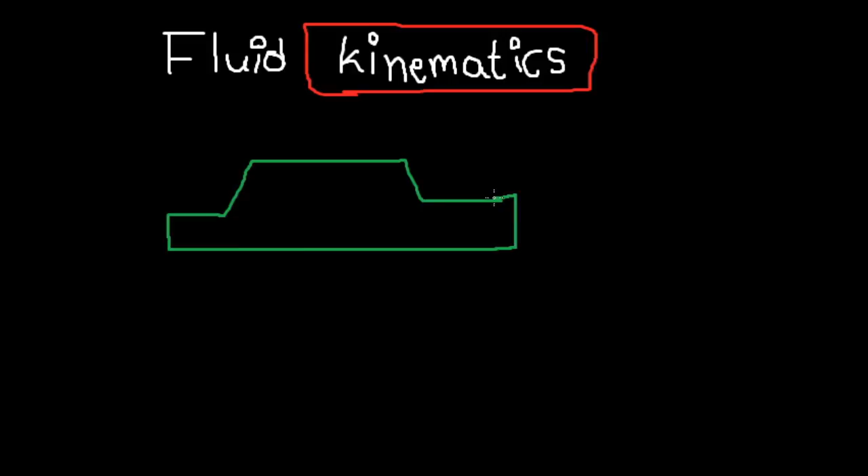So I'm going to highlight this with the red color. So kinematics is a branch of science which deals with the motion of particles without considering the forces acting on it. Suppose, let me say, there is a vehicle, a car. No, I'm not a good artist, but I'm trying my very best to explain. A car, and imagine a person was pushing it from the back face.

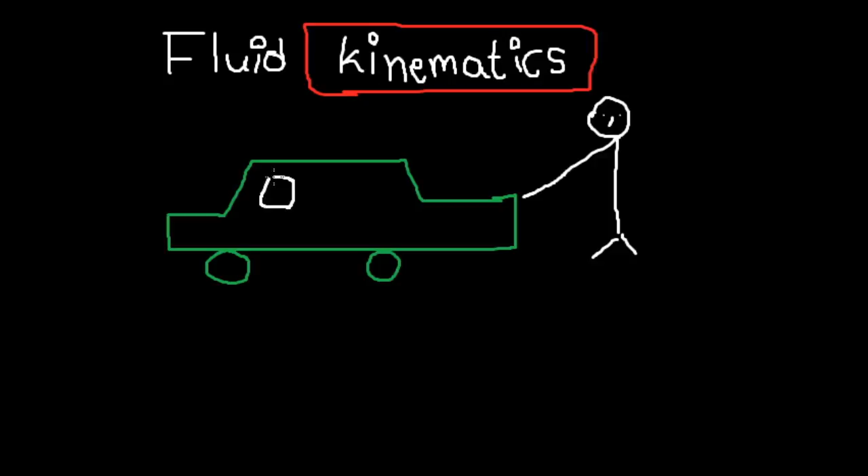So in kinematics, the kinematic science tells about the motion of the car here in this example, but it will not consider the person who is pushing the car, and indirectly he is applying the force, as the figure tells us. So kinematics is a science which tells about the motion of the particles. Here the particles or specimen or object is the car, without considering the forces acting on it.

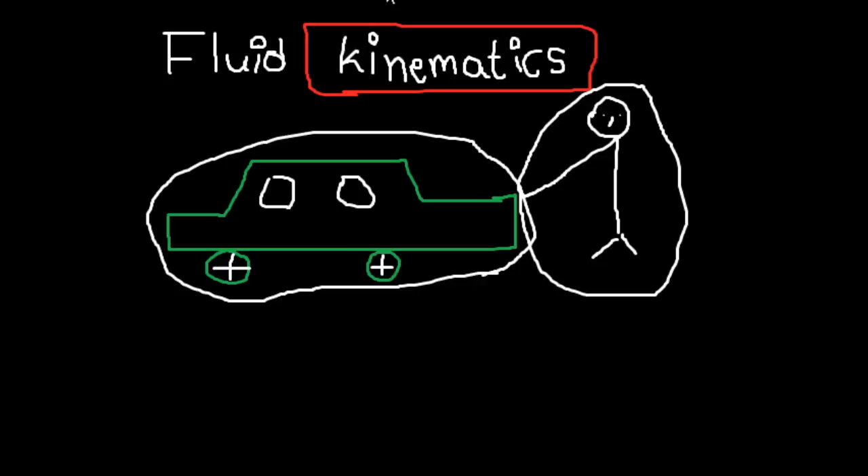So if the person is acting on the car, he is a force, but kinematics will neglect him and only see about the acceleration, velocity, or something, which scientific terms we will see later. So when coming into the fluid kinematics, we will see about the liquid and their flow. And similarly, when we go into the fluid dynamics, let me move this around.

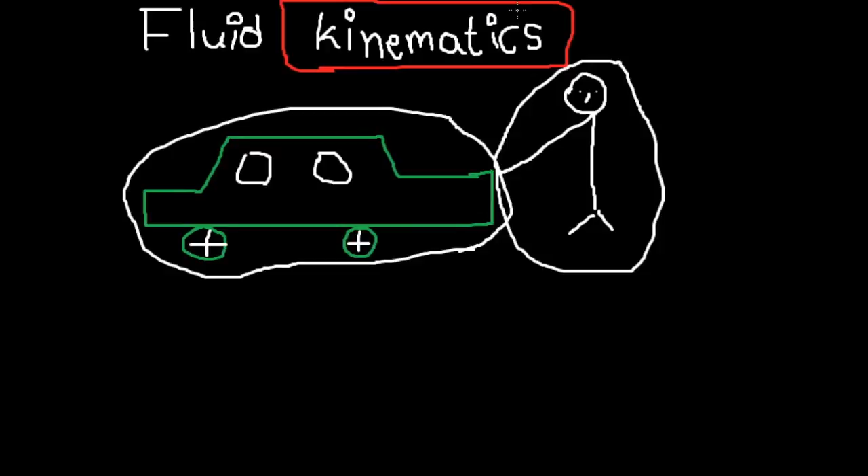Fluid dynamics is also similar to kinematics, but in this case of fluid dynamics, it is a science which deals with the motion of the particles while also considering the forces acting on the object or the particles. So unlike kinematics, dynamics is a branch of science which explains the motion of the particles or object or specimen. Here the car is an object, or it is better to call it particles.

Don't take this example literally; I was telling this example for you to understand it well. So imagine the car is a particle. Dynamics is a branch which will also consider the forces acting on the car. Here the person who is pushing it is a force acting on the particle called car. So kinematics neglects the force acting on the object, and dynamics also considers the force acting on the particles.

Now, to study fluid kinematics and fluid dynamics very well, we need to learn about the types of flows. There are 6 types of flows in fluid. The first one is steady and unsteady, and the second one is uniform and non-uniform flow. My writing will not be so good while using a mouse to write. Uniform.

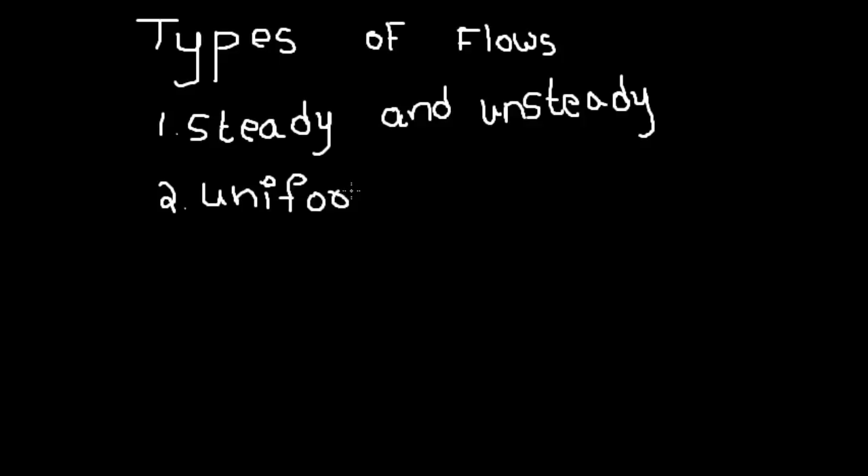Sometimes I pause the video while I'm writing, because otherwise it is inconvenient for me and you, taking a long time to watch the video.

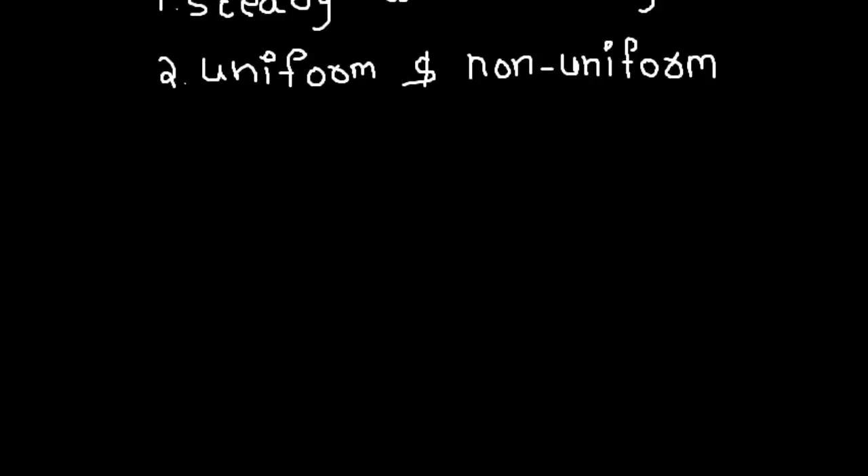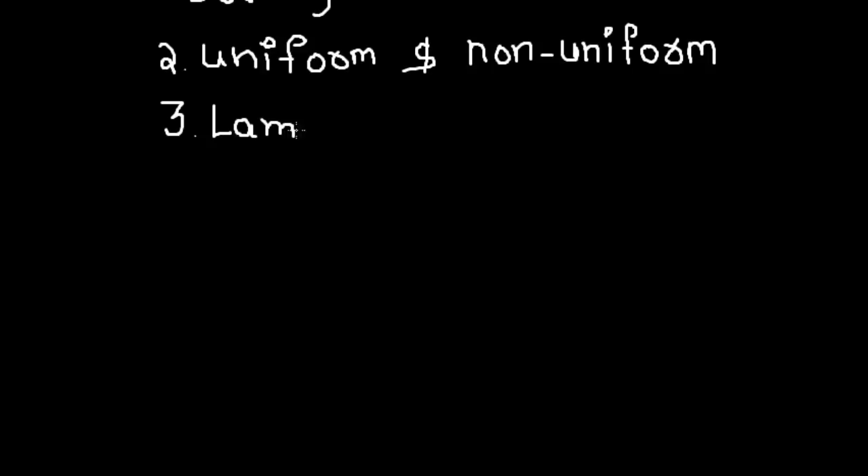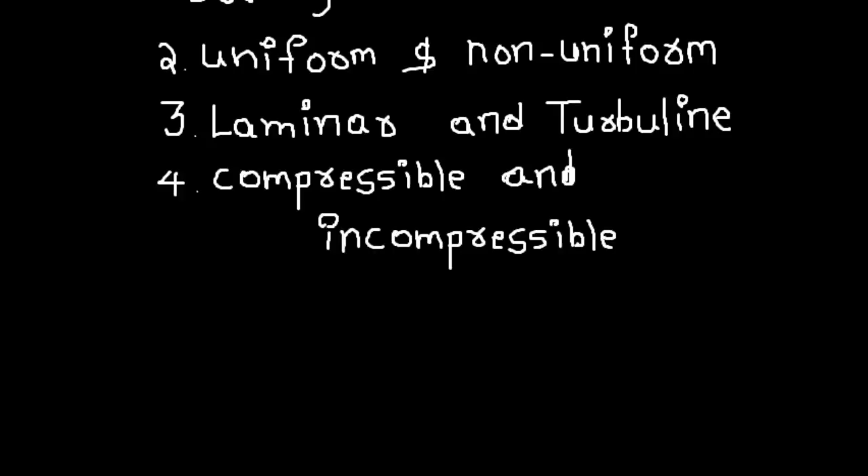And the third one is laminar and turbulent flow. And coming to the fourth one, it is compressible and incompressible. And the fifth goes to rotational and irrotational, and at last the sixth one, which is 1, 2 and 3D flow, which is one dimensional, two dimensional and three dimensional flows.

You may not see anything about this last sixth part, that is 1, 2, 3 dimensional flows, in my videos, because that doesn't cover my syllabus and I don't know about them.

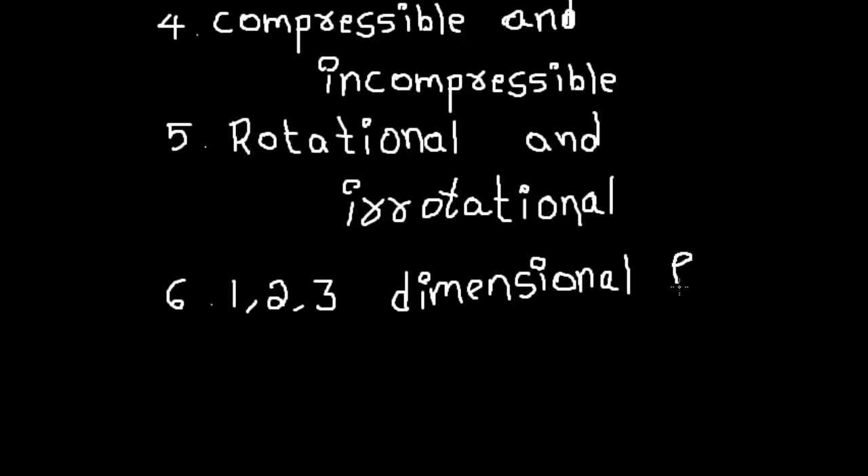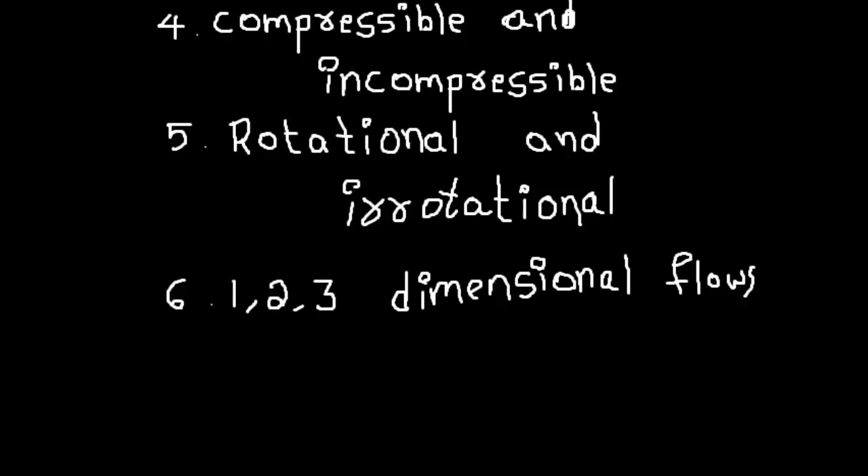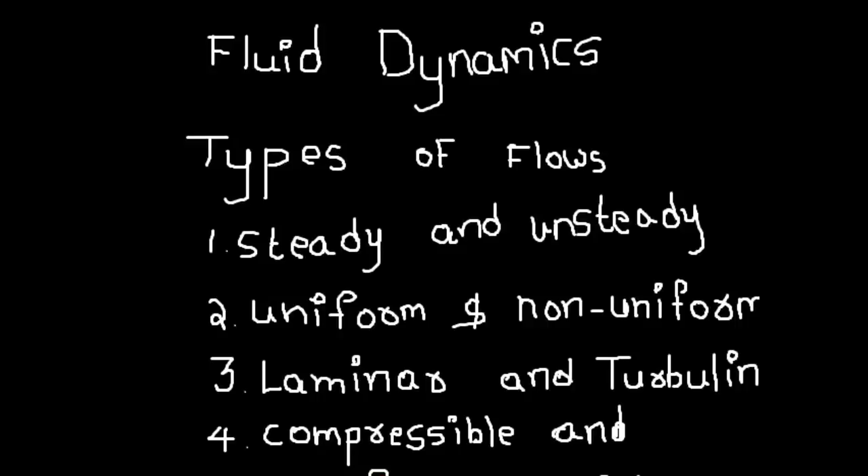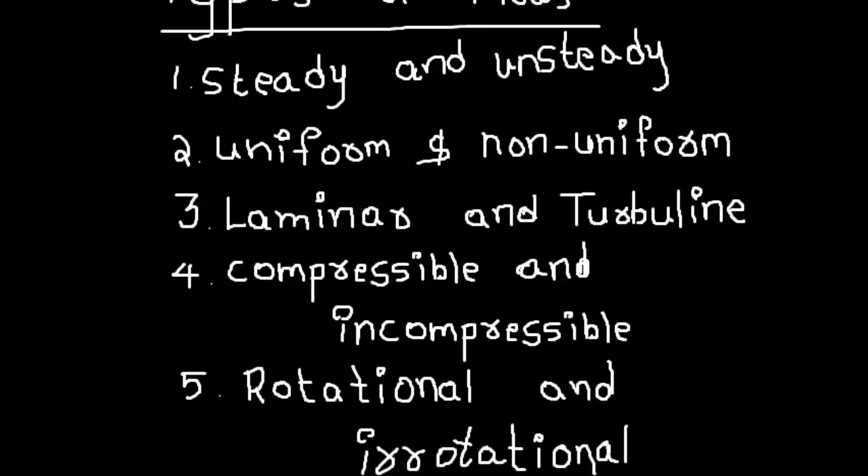So let us have a look once again. So we'll learn about fluid kinematics, which doesn't consider the forces, and then fluid dynamics, which considers the forces acting on the particles. And coming into the types of flows, there are 6 types: steady and unsteady flow, uniform and non-uniform flow, laminar and turbulent flow, compressible and incompressible flow, rotational and irrotational, and at last one dimensional, two dimensional and three dimensional flow.

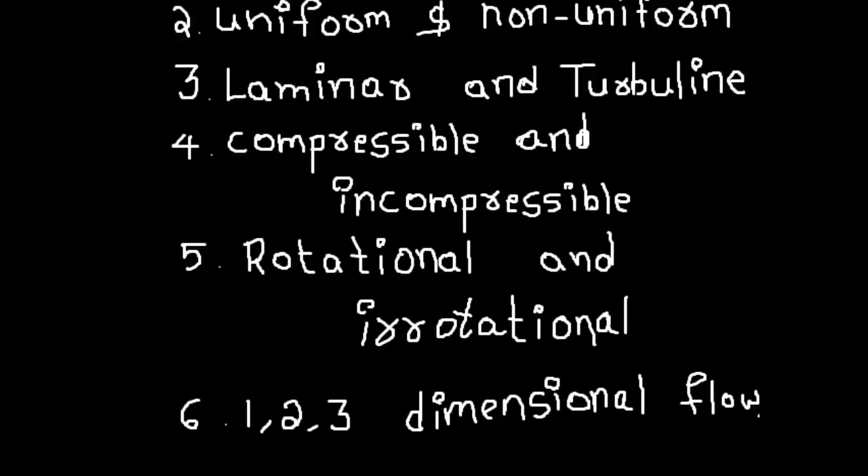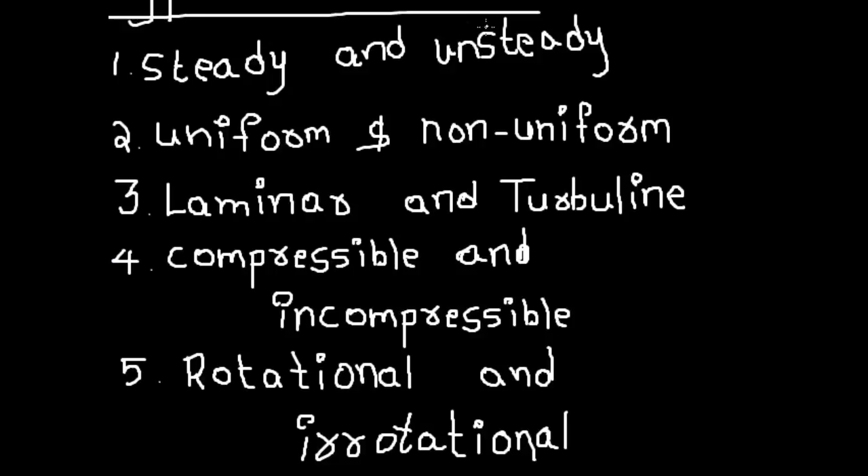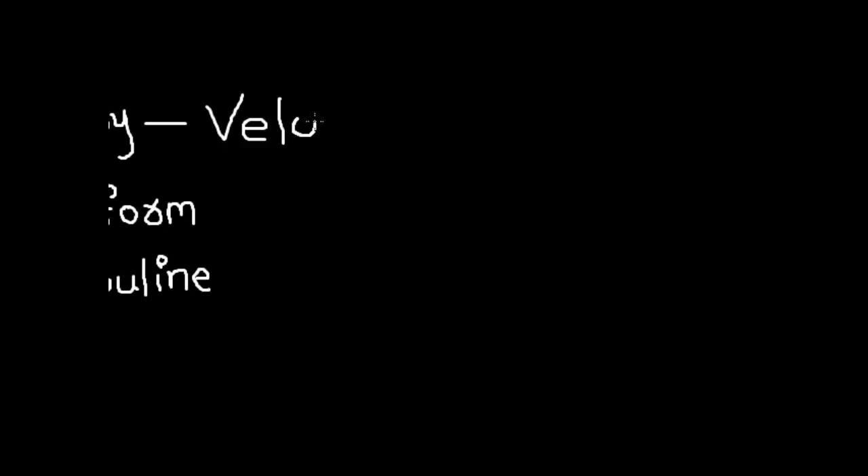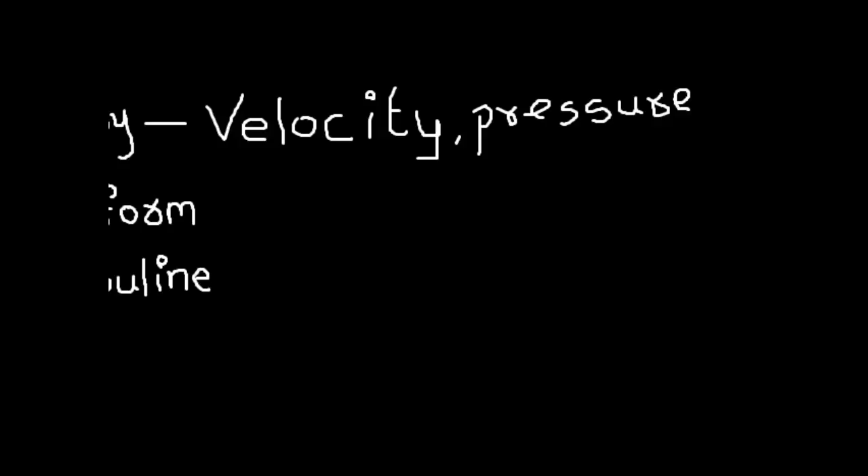Now let us see each one by one. So coming to steady and unsteady, these depend upon the fluid characteristics like velocity, pressure and density. I'm going to write it over here. So it depends upon velocity, pressure, and density.

So what I said is steady and unsteady flow is a type of flow that depends upon the 3 properties of the fluid: velocity, pressure and density. So how we tell is that if these 3 properties of a fluid at a point do not change with time, that is known as a steady flow.

And if velocity, pressure and density at a point change with time, then it is known as unsteady flow. Since they are changing with respect to time, they are unsteady, so it is known as unsteady flow.

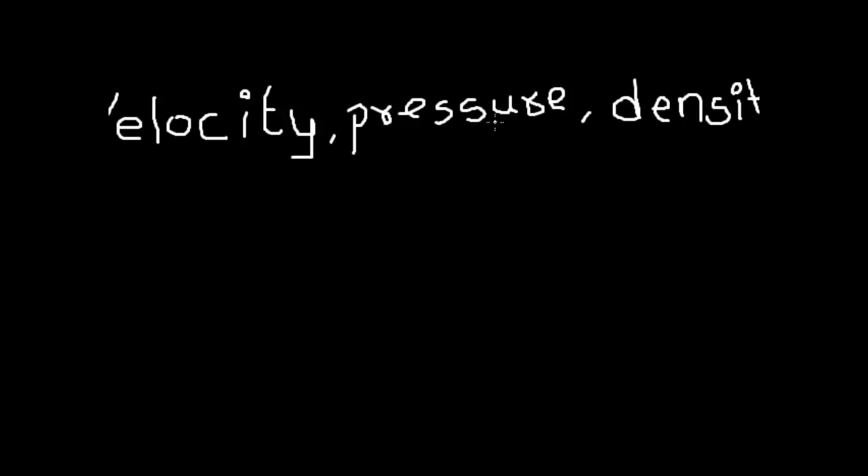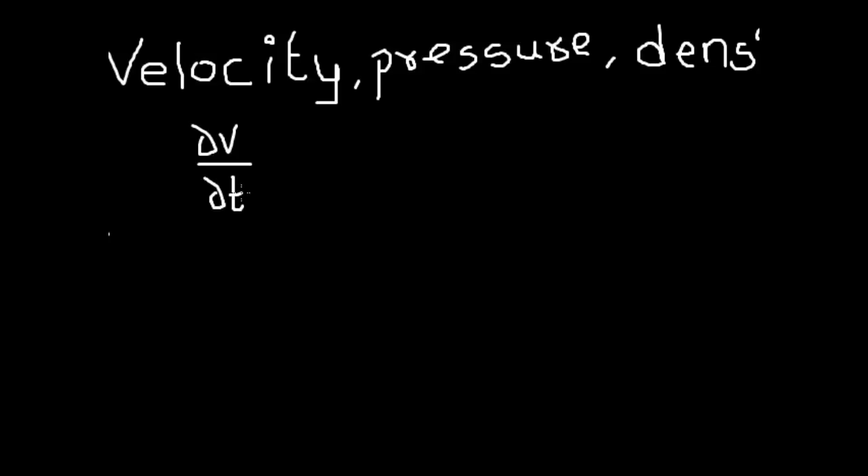So coming to the steady flow, the 3 equations can be given for velocity, pressure and density by writing ∂v/∂t = 0. This is for steady flow, and here we can write at x₀, y₀, z₀ equal to 0. And for the pressure, I will copy and paste it, it will save time.

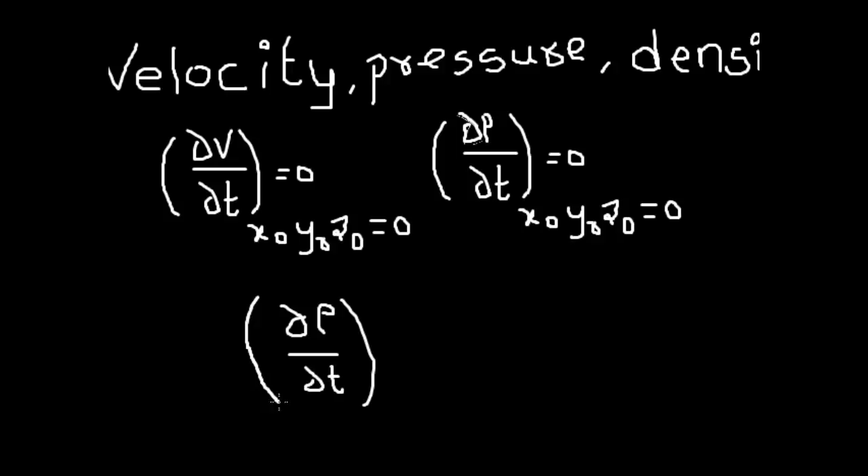Okay, for pressure we can write it as dou p by dou t is equal to 0. And similarly for the density we can write it as dou rho by dou t, which is again equal to 0. And we can suffix as x naught, y naught, z naught is equal to 0.

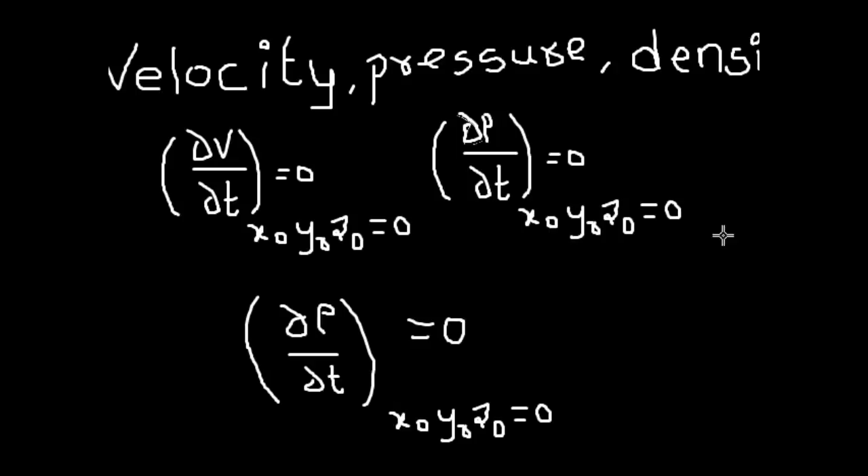For unsteady flow, since they change with the time, they should not be equal to 0. I mean, velocity should not be equal to 0, pressure should not be equal to 0, and as well as density should not be equal to 0. So that's about steady and unsteady flow.

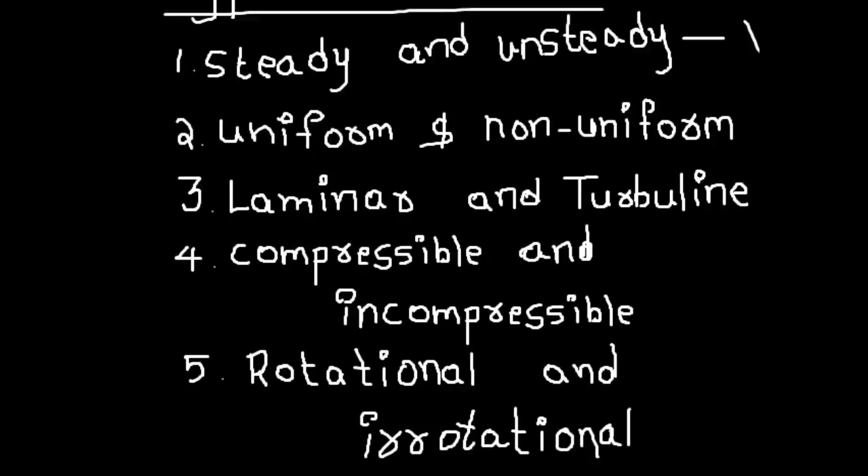And next, going into the uniform and non-uniform type of fluid flowing, it is the type of flow in which the velocity at any point of time does not change with respect to space. Here the only property is velocity, and at any point of time it should not change. What they mean is the velocity at any given point should stay there and it should not move in the space. So it is known as uniform fluid flow.

Its equation can be given as, wait a minute, I have to change this to brush. Dou v by dou s should be equal to 0, and t is constant.

And if the velocity at any point of time changes with respect to space, then it is known as non-uniform flow of fluid. So it will not be equal to 0 in case it is a non-uniform flow of fluid, and it will be equal to 0 when it is a uniform flow of fluid. So that's about uniform and non-uniform.

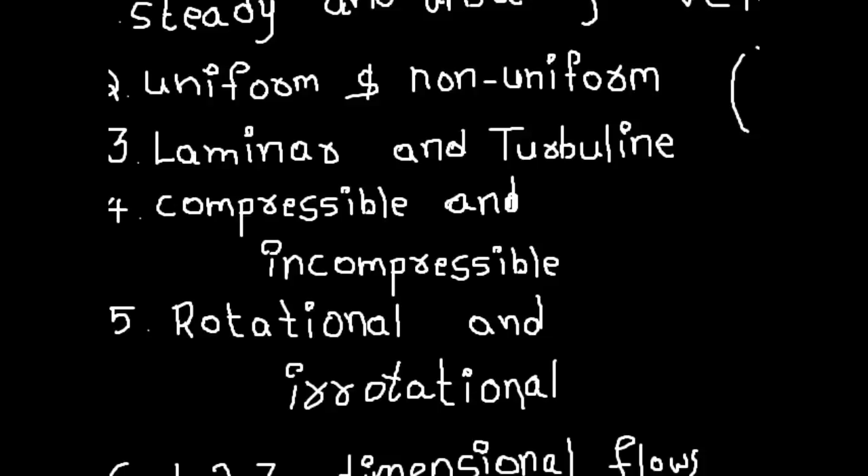And next, after completion of steady and unsteady flow and uniform and non-uniform flow, the next thing is laminar and turbulent flow. Let me write it over here. So laminar and turbulent flow depends upon a number which is called Reynolds number. I think the spelling might not be correct. This number depends upon viscosity and velocity and diameter, I mean, a cross-sectional area of the fluid which is flowing.

Viscosity in the sense here kinematic viscosity, and if the Reynolds number is less than 2000, then it can be said as laminar flow. And if the Reynolds number is greater than 4000, we can say the type of flow is turbulent flow.

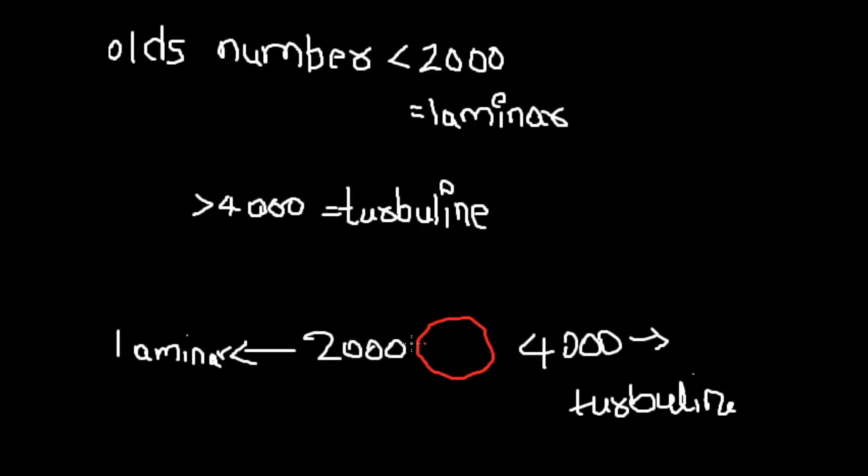So what about the middle part over here? If the fluid's Reynolds number lies in between, then the flow is called transition flow, and this transition flow is again defined as laminar or turbulent flow according to the nearest number, either 2000 or 4000. Suppose we have the Reynolds number as 2500, which is nearer to 2000, then it is considered laminar flow.

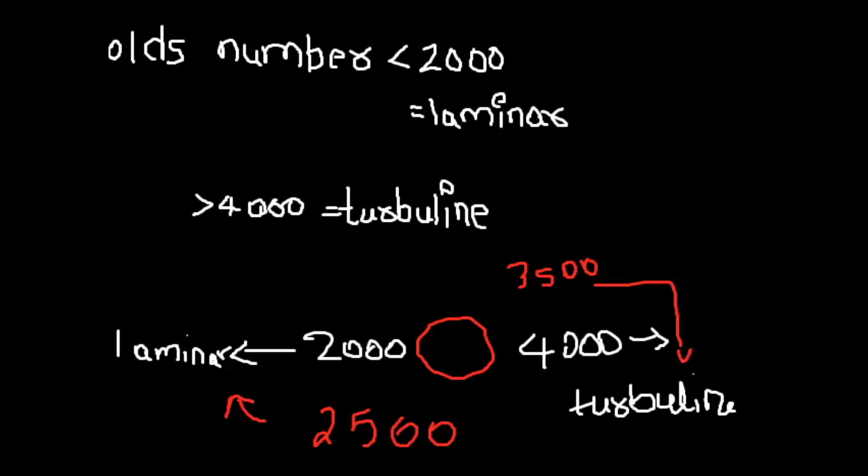And if the Reynolds number is about 3500, which is nearer to 4000 than 2000, then the flow of fluid is known as turbulent flow. So that's about steady and unsteady, uniform and non-uniform, laminar and turbulent. Next, going into compressible and incompressible.

If the attraction gap between the molecules is very large or high, then it is known as compressible. It is explained by Lagrangian. Compressible is also known as pneumatics, and incompressible is also known as hydraulics. We mostly see about compressible fluids.

The best example for this is if you fill a balloon with a huge amount of air, it can handle it, whereas inside, its density changes. But if you pour a little bit higher amount of water into a glass of water, it cannot handle the density. So gases mostly have the compressible property. Since it is proposed by Lagrangian, it is also called pneumatics. And incompressible fluids are proposed by Eulerian. It is called hydraulics. It depends upon the attraction gap between the molecules.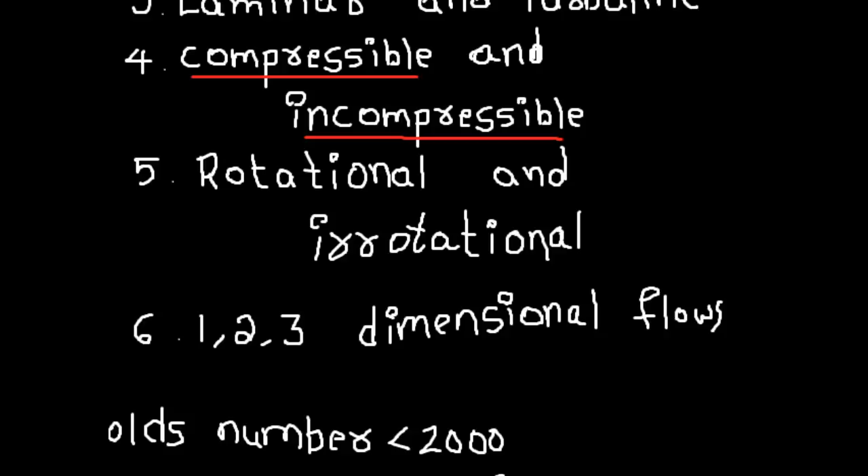And after compressible and incompressible, we see about rotational and irrotational. So when the fluid is flowing, if it is moving in a straight line or a streak line or a streamline, then it is said to be rotational. If it is moving in a zigzag motion or something similar, it is known as irrotational.

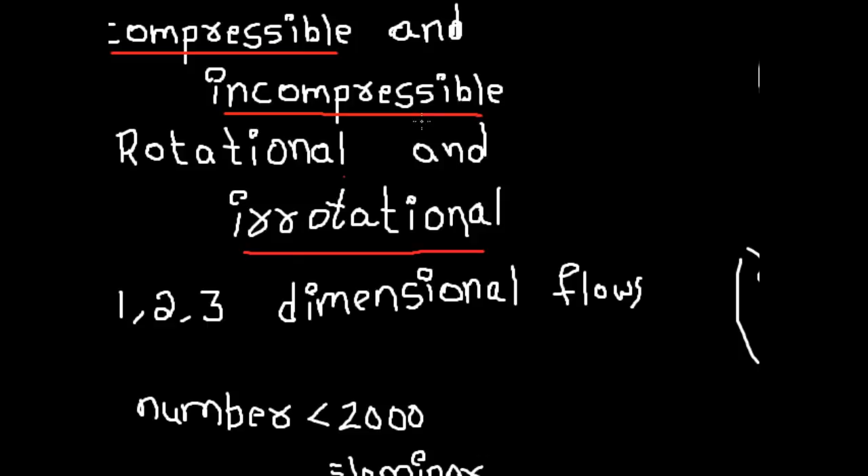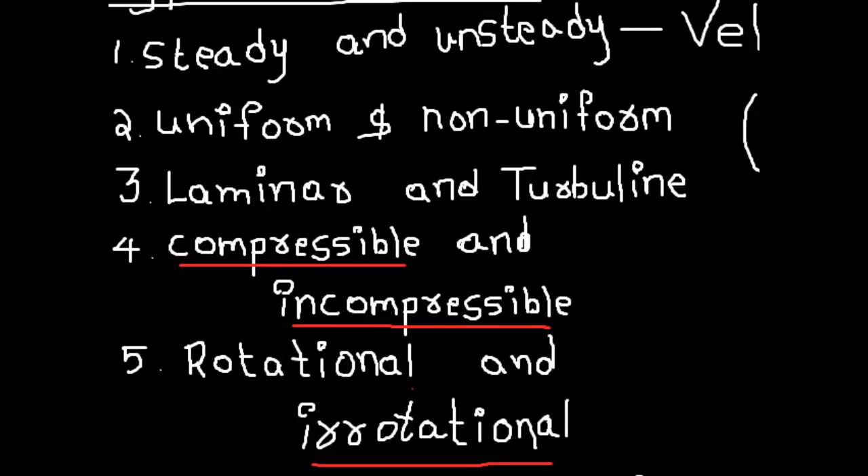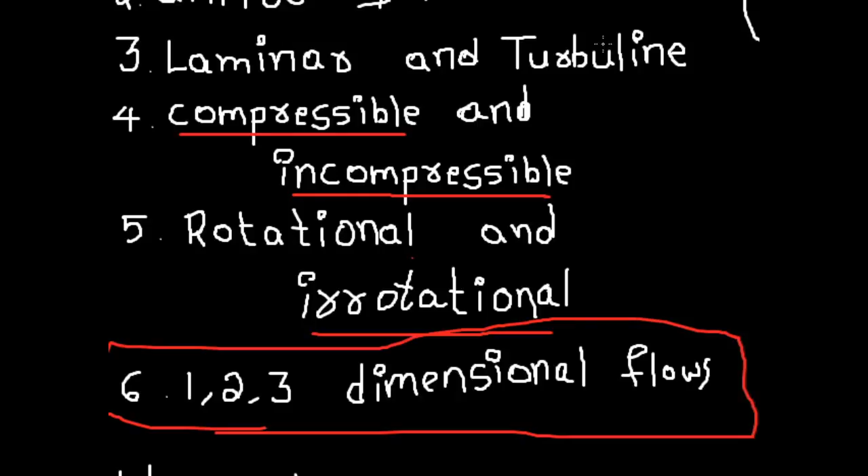That's all for now, and I tried my best to explain. I too don't know it in much depth; I also started to learn. So that's about types of flows, fluid kinematics and fluid dynamics. I don't know about the 1 to 3 dimensional flows; it is not in my syllabus. So that's about the introduction of fluid kinematics and fluid dynamics, which is a part of FMHM, I mean fluid mechanics and hydraulic machines.